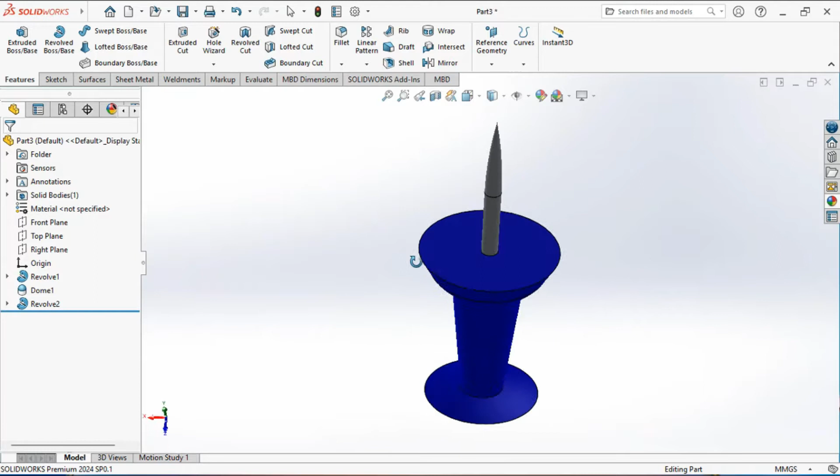Today, we'll be creating a drawing pin using the Revolve feature in SolidWorks.

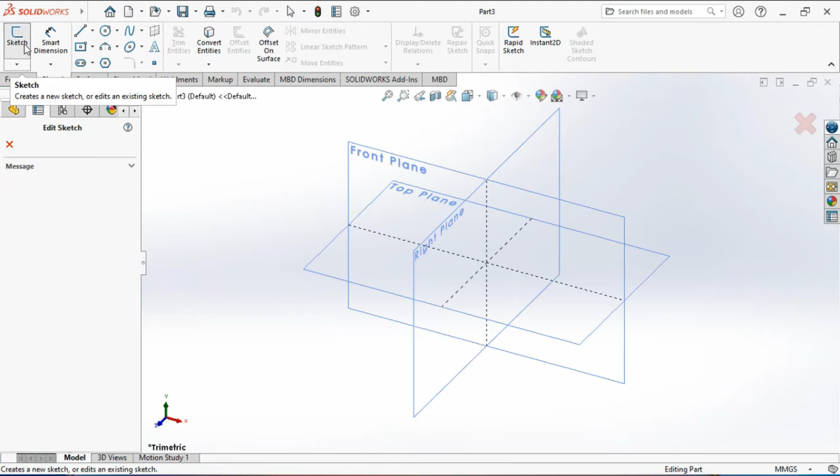We will begin by creating a sketch for the base feature, the first or parent feature of our model. Activate the Sketch tool, select the top plane as the sketching plane. You are now in the sketching environment.

Activate the Line tool and draw a vertical line like this, then a horizontal line like this, an inclined line here, and an arc. To create an arc, move the cursor back to the end point of the line, then move the cursor. The arc mode gets activated, and now click to specify the end point of the arc.

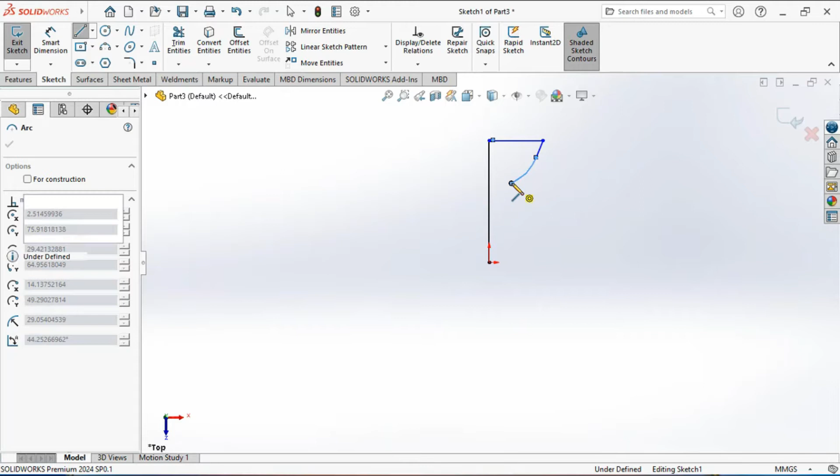Once the arc is drawn, the line mode gets activated. You can continue to draw the line. Now again an inclined line. And lastly, create an arc here, then close the sketch.

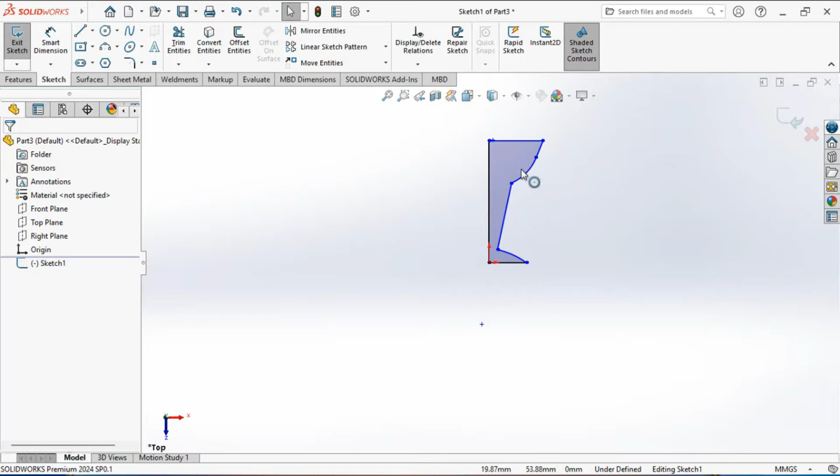After creating the sketch, right-click and then click on Select to exit the tool. Next, we will apply the relations and the dimensions to fully define the sketch.

Select this arc and this line and set the tangent relation between them. After that, activate the Smart Dimension tool. Select this vertical line and set its length to 12 millimeters.

Now select this horizontal line and set the horizontal distance as 5 millimeters. Now select this inclined line and set the vertical length as 1.5 millimeters. And then select this arc and set the arc radius as 2 millimeters.

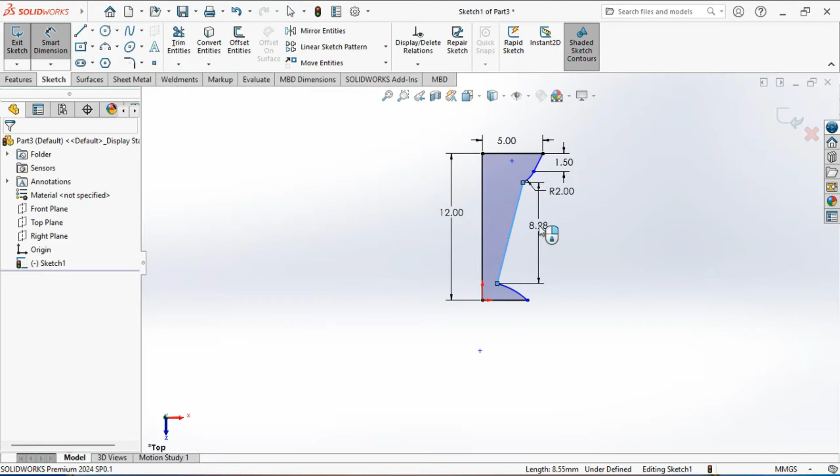Now select this inclined line and set the vertical length as 9 millimeters. And then select this arc and set the arc radius as 16 millimeters. Now select this horizontal line and set the horizontal length as 4 millimeters.

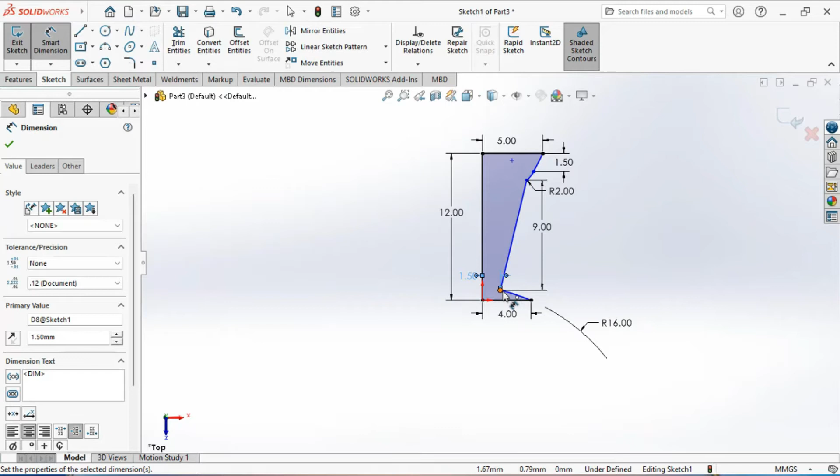Now select this point and the vertical line and set the horizontal distance between them as 1.5 millimeters. And again, select this point and the horizontal line and set the vertical distance between them as 0.5 millimeters.

You can see after applying all the dimensions and relations, the sketch becomes fully defined and all the entities turn black. Next, we will revolve this sketch.

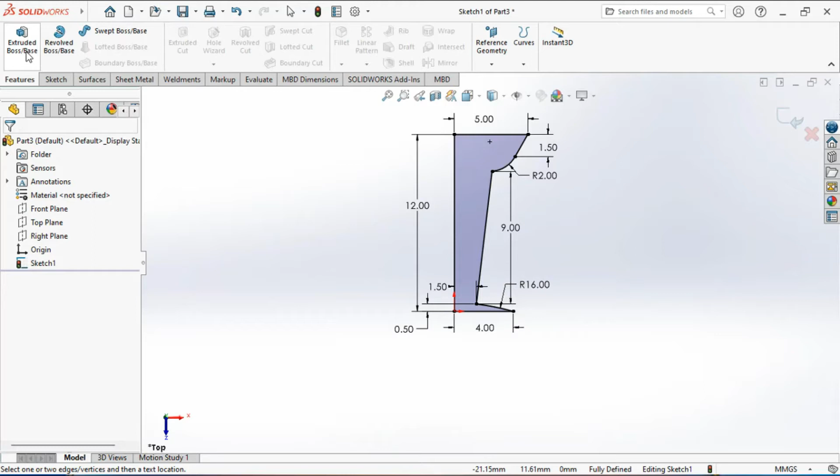Go to the feature, activate the Revolved Boss/Base tool. Select this line as the axis of revolution.

The Revolve feature is used to create a solid by revolving a 2D profile around an axis. This is ideal for creating symmetrical objects like our drawing pin, as it simplifies the creation process by rotating the sketch around a central axis.

Click on the green checkmark to confirm the creation of the Revolve feature.

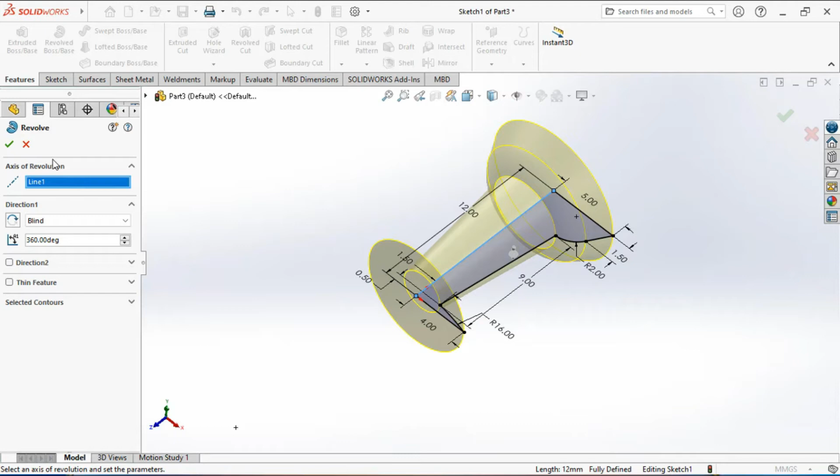Next, we will apply the Dome feature. Go to the Insert tab, then to the feature, and then activate the Dome tool. Select this face as parameters and set the distance to 1 millimeter.

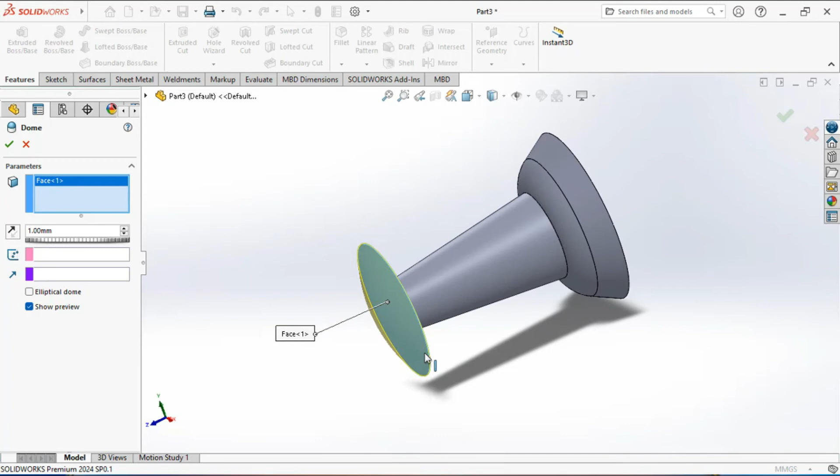The Dome feature is used to add a rounded, dome-shaped surface to a selected face. This is particularly useful for adding details like the rounded tip of the drawing pin. Click on the green checkmark to exit the tool.

After that, select the right plane and activate the Sketch tool. Then activate the Centerline tool and draw it here. Then right-click and click on Select.

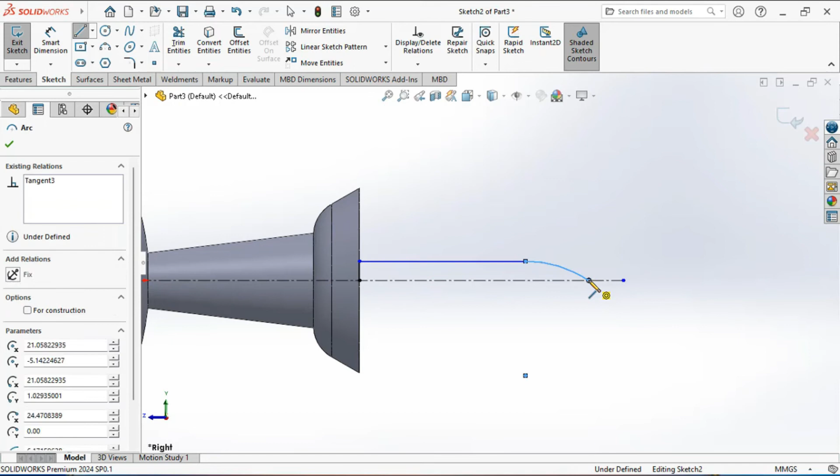Activate the Line tool and draw a vertical line, then a horizontal line, and an arc like this. Now close the sketch. Right-click and click on Select to exit the tool.

Activate the Smart Dimension tool. Now select this horizontal line and set it to 5 millimeters. Now select this line and set it to 11 millimeters. And then select this vertical line and set the length as 0.6 millimeters.

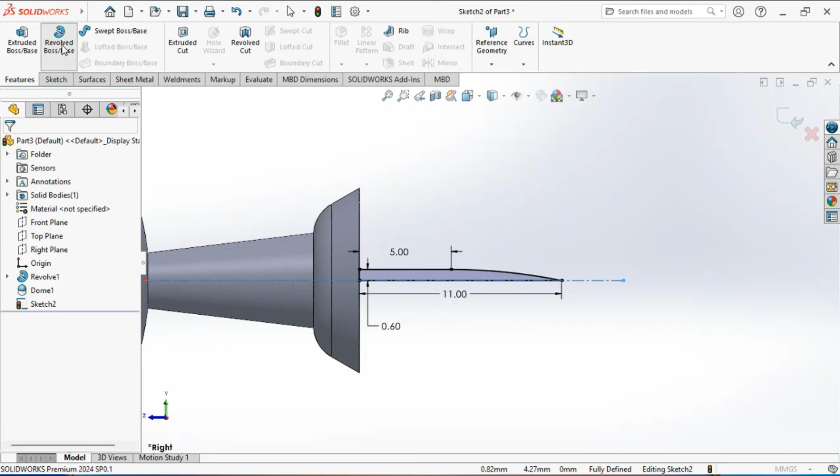Next, we will revolve it. Go to the feature, activate the Revolve Boss tool. Preview appears. Click on the green checkmark.

And after that, we will change the appearance. Select this and this with the Control key, and then click on Appearance and select this. The Appearance library appears. Open the Appearance library, open Plastic, and select High Gloss.

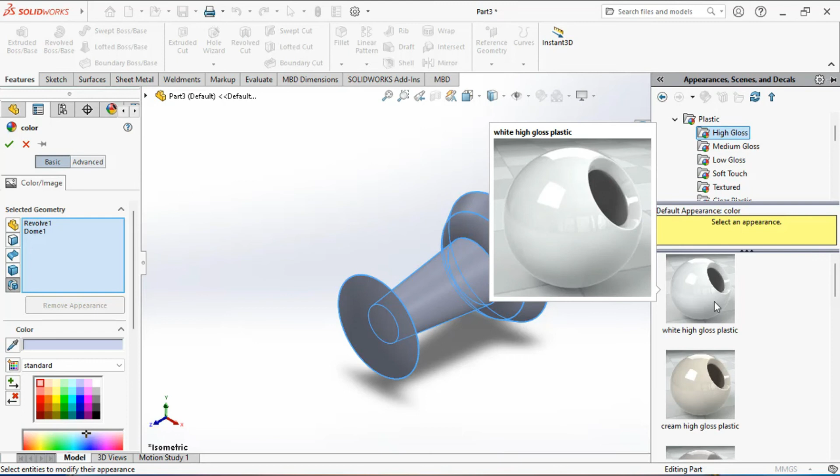Then go here and select High Gloss Plastic. Double-click to apply it. Go here and select blue color. Now click on the green tick mark.

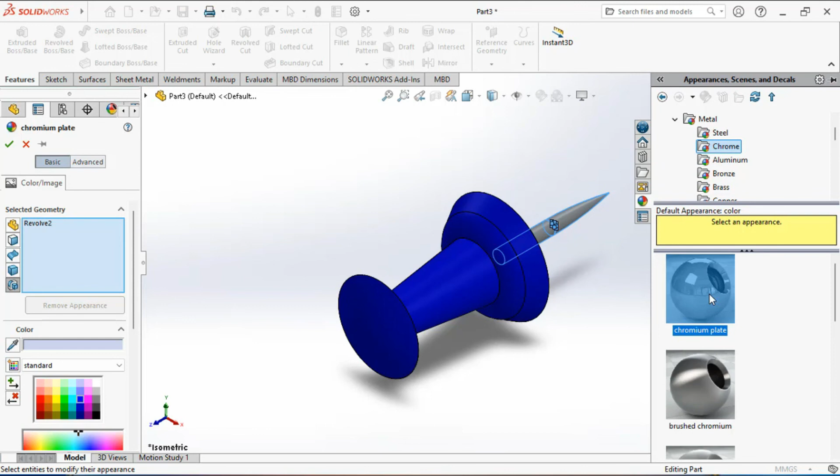Now select this, and then click on Appearance and select this. The Appearance library appears, already open here. Go here, open Metal, select Chrome, and select Chromium Plate. Double-click on it. Now click on the green tick mark, and that's it.

You have now created a drawing pin in SolidWorks.